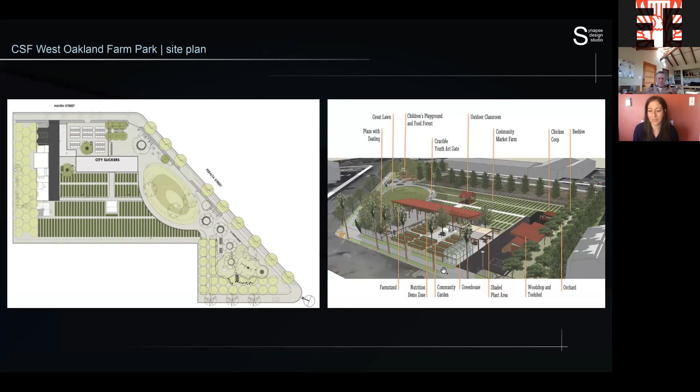Here's a visualization that was done by Lowney, not me. But you can see this was kind of the proposed view from the entry.

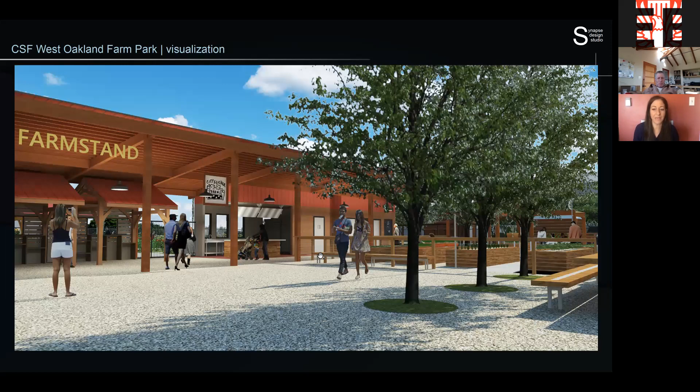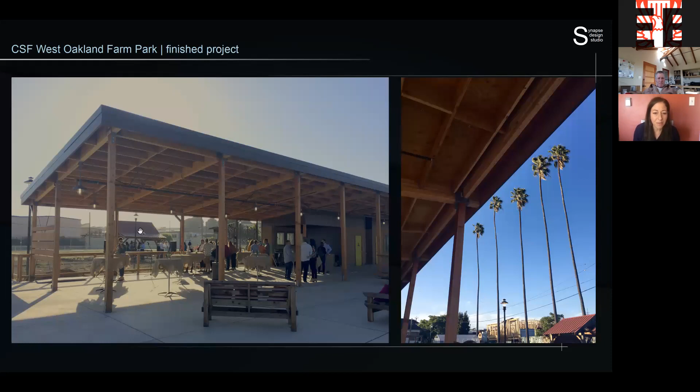And then this is the finished project with the big pavilion. You can see the outdoor classroom out here in the background, and then the actual enclosed building space underneath.

Okay, I think that's it with that. So then my very first project out on my own when I started my firm in 2016 was Cat Town in downtown Oakland. Cat Town is a cat adoption center which has a cafe attached. It was the first of its kind in the US.

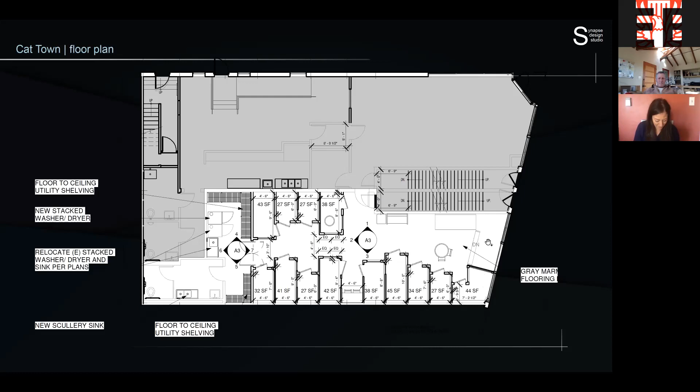So we did some really quick visualizations out of SketchUp to try out some of the ideas. This was just a very basic 3D visualization where we were explaining to the executive director how the spaces would vary, both in their footprint and also in their height.

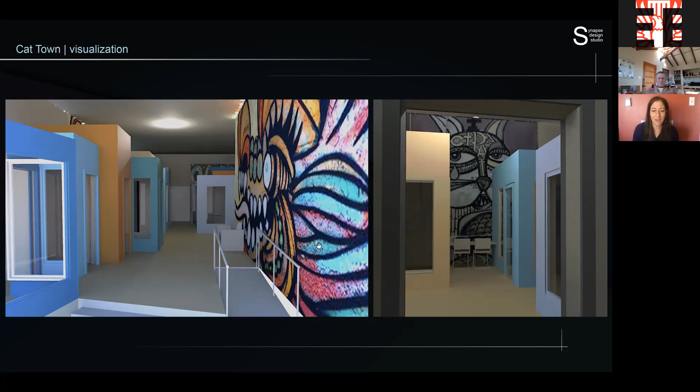The idea was to evoke little clusters of buildings instead of having this sterile clinical environment, something that would evoke a more organic neighborhood feel. And they liked this, so this is what we moved forward with.

Here you can see some construction photos, a little bit of framing, a little bit of just getting the drywall up. Now that I've hung drywall myself, I realize our drywallers probably hated us.

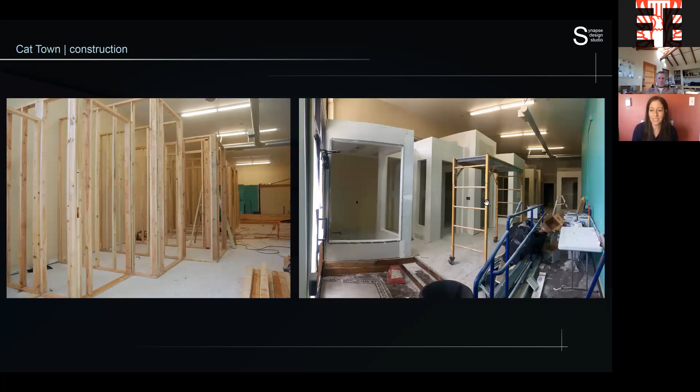That was a very fun project to work on and very rewarding. Whenever I've gone to visit, the executive director always tells me that it works really well and that the visitors really love the layout.

Okay, the next one, Vintage Berkeley and Vine Street.

This is in Berkeley. There were a couple of objectives: to enlarge the tasting area that was there, to rework circulation to allow direct connection between the retail and the rear patio, and to create visual interest at the rear of the store to draw people in and back.

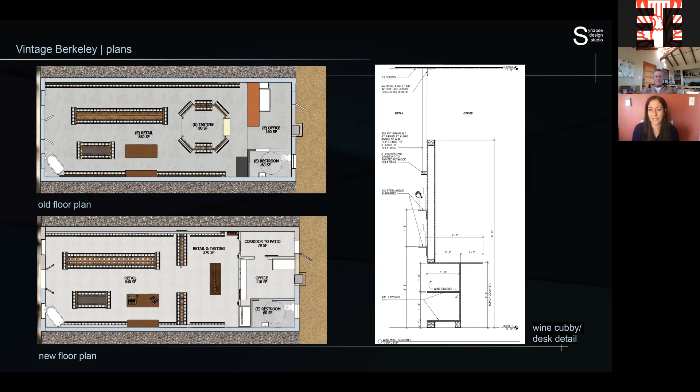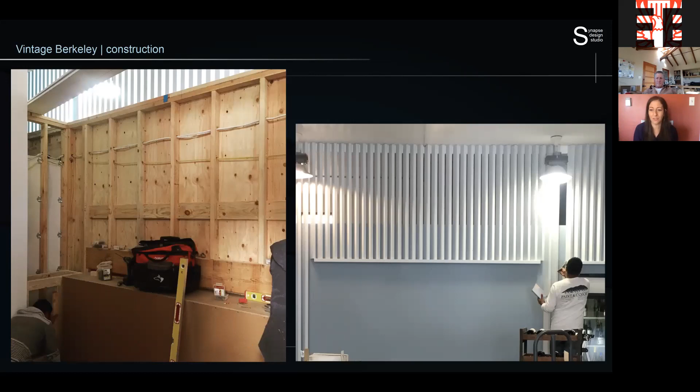There's one of the guys working on the slat wall. One of the fun things about this is that the slats are installed at an angle. So if you move through the space from left to right, you get this movement feeling, differentiation of transparency as you move, depending on what angle you're looking at those slats from. So that's kind of fun.

Here you can see the build out of the cubbies. And then this is the desk on the flip side of it.

And then as a nod to our industrial historical building, we used steel angles as the shelving for the wine.

And then there's the mostly finished photograph, which looks a lot like the renderings, I think. So they're pretty happy with that.

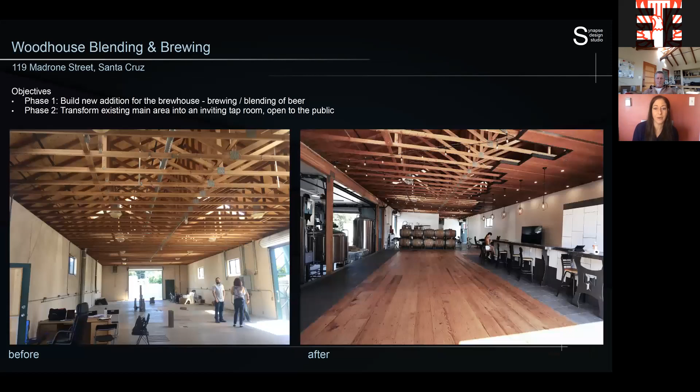And that's it. Go check them out. Oh, well, they're not open, but they are delivering wine if you are interested in getting some.

The next one was a project, also one of my early clients from 2017, Woodhouse Blending and Brewing in Santa Cruz. This is an adaptive reuse project. We are converting an old sawmill to a brew house and tap room.

This picture on the left is kind of what it looked like when I first went there to check it out. It's just this empty open building, rectangle. And this is the finished, but we'll come back to that.

Woodhouse, the clients are 4 friends who've known each other for years. One's a brewmaster, one is a graphic designer, and they'd always dreamed of opening a brewery together. These are some of my favorite clients, people who have this dream of what they want to bring to the neighborhood. We also had to remove this giant cyclonic sawdust filter thing that you'll see later on.

This happened in 2 phases. Phase 1 was to build a new addition for the brew house. And then phase 2 was to transform the existing main area into the tap room open to the public.

The building is on a parcel with a bunch of other buildings, so that made our approval process a little trickier. Parking and accessibility definitely were big parts of this project.

The floor plan on the right is the phase 2, but you can see what we did during phase 1, which is this whole not quite rectangular piece was the addition. And these are the kettles, the beer brewing kettles and the granary.

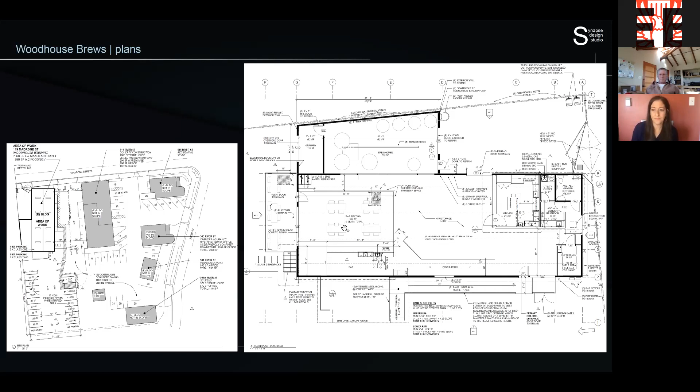Okay. All right. So, okay.

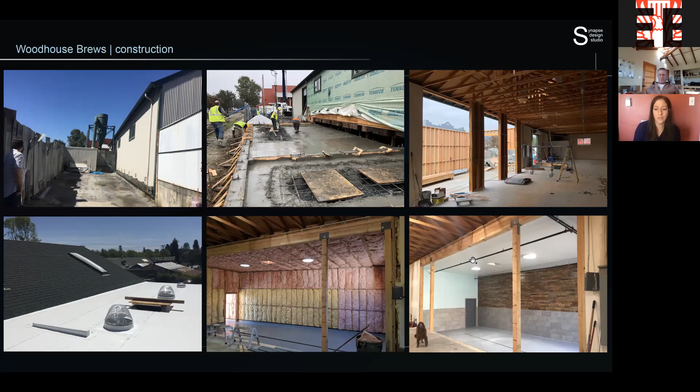solid ceiling over the bar area, bringing it down for a little bit more intimacy and just to change it up a little. I think that's it. Oh yeah, and then the exterior.

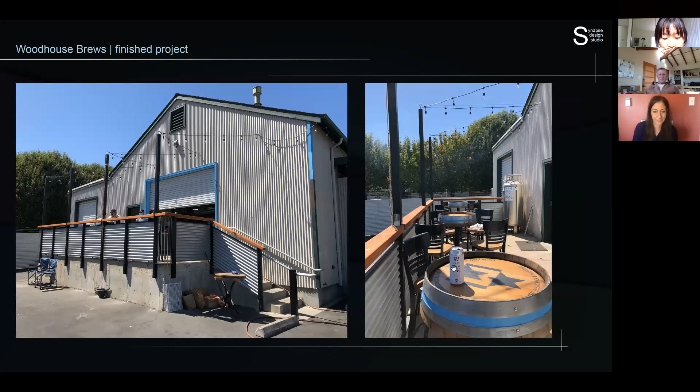So here you can see this little jut out is the new brew house granary area, and then the exterior patio, which I believe was open for a while before everything got shut down again. So if you're down in Santa Cruz, go support them. They're really fun.

The next one is Malaya Tea Room, which is in Alameda. The owner is a woman who grew up in Malaysia, which has an English-style tea culture as a remnant of English colonialism. They do afternoon tea, but with kind of a tropical twist, with different kinds of flavors and aesthetics.

So the owner told me she had long dreamed of opening a Malaysian-style tea room, something that didn't exist in the area. Again, a business owner bringing their special sauce to the neighborhood.

These are my favorite. The space was an empty shell, which had previously been some kind of retail. We designed and installed the tiniest kitchen we could while still meeting all the clearance requirements.

Most of the interior finishes and furnishings were things that had been collected by the owner. It was a pretty straightforward project with, I guess, the hardest thing was just kind of fitting the kitchen in

and getting that approved. And then the best architectural thing is probably this beam that we discovered behind the ceiling. So we demoed the ceiling and got to expose this really cool beam.

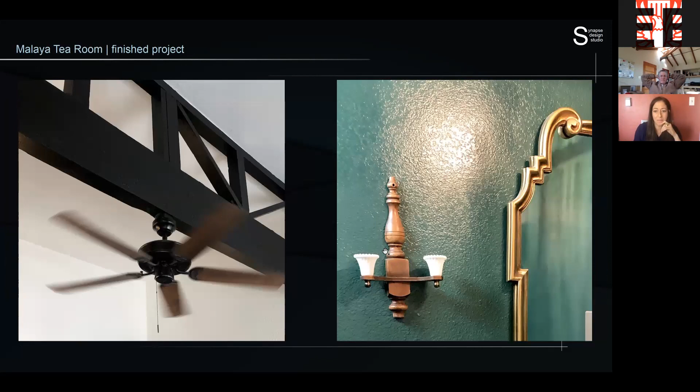All right, so I think this is the last project I'm going to talk about, the Alameda Cannabis Retail. After legalization of cannabis, Alameda opened up an RFP process for cannabis projects on the island.

It was very limited and a very competitive process for storefront retail. There would only be 4 total storefront retail shops allowed, 2 north of Grand and 2 south of Grand. So my clients, who are the owners, bought this building intending to create a boutique cannabis retail and wellness center.

The biggest design hurdle was that this is a residential building, and you can see there's this kind of weird closed-in sunroom at the front, and that is at grade. And then there are steps that go up to the main part of the house.

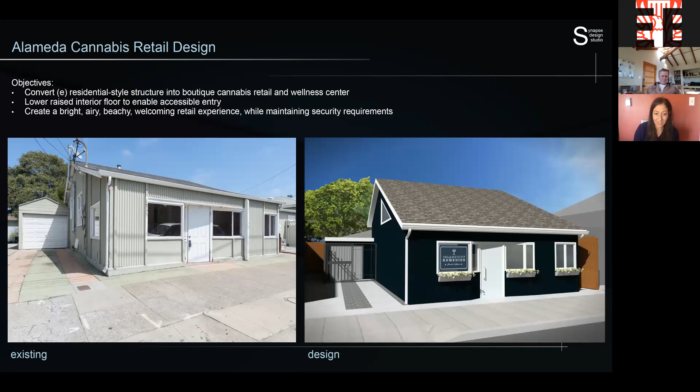It's about a 30-inch difference in height. So the trickiest thing we were looking at was accessibility requirements, and a 30-inch difference would require a 30-foot ramp, and there was no way we were going to be able to do that. And they didn't want to take up the footprint of a lift.

So what we came to was that we would demolish this floor and lower it to grade, pour a new slab, and just have a continuous level at grade.

So they did make the first cut of the RFP process, and they were down to the final 8. At that point, the owners were engaging with investors who needed to see renders of the space for their pitch deck.

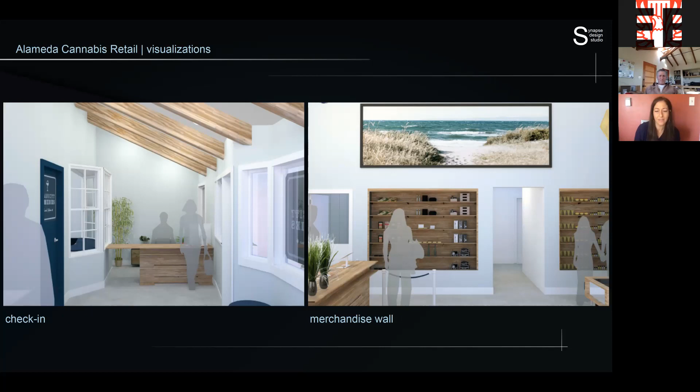Their goal aesthetically was to have something bright and light and beachy, kind of reflecting the soul of Alameda, the way they saw it. If you look to the left, you'd see some more merchandise, a sniff table, and a little window seat. To the right was the west wall, the checkout area.

Ultimately, they were not selected by Alameda as one of the final awarded owners, but they were waitlisted. So in theory they could eventually maybe build it, but for now it hasn't been built. So all we have are these pretty pictures.

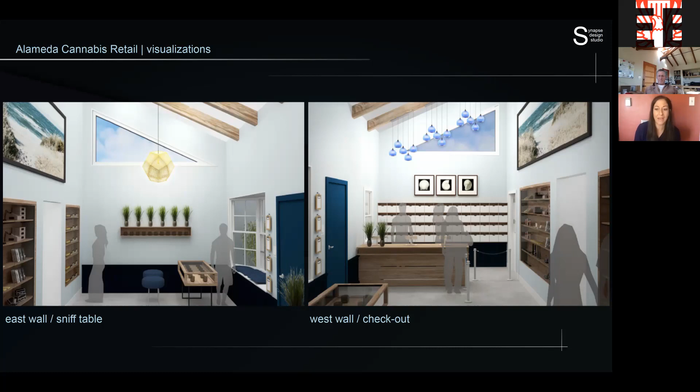Finally, I wanted to talk about a couple of the other things I've been doing that are building related and kind of feed my soul.

I've volunteered with All Hands and Hearts, which is a crisis response organization around the world. I went to Puerto Rico, this was after I went in 2019. They were still doing work following hurricanes Irma and Maria that hit in 2017. Maria hit right here in Yabucoa, and that's where we were based. There was massive destruction throughout, especially the southeast side of the island.

But most of the work we were doing was roof repair and mold remediation. Here you can see us on the roof - this is me in the back laying on my stomach. We were installing concrete cant strips underneath this ledge because there was water pooling there and leaking in. A lot of what we did was power washing these roofs, scraping off old sealant, trying to fill concrete cracks, and then painting new sealant over the roof.

And then these are some of the folks who are doing the mold remediation.

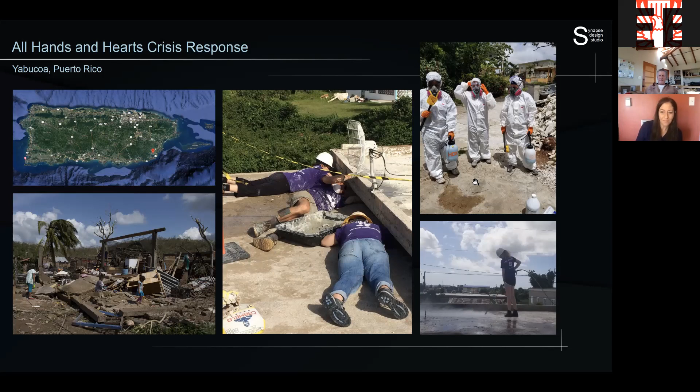The other thing I'm doing locally, which has been so much fun and so rewarding especially these last few months, is volunteering doing construction at the Youth Spirit Artworks Tiny House Village here in Oakland. This is a project providing, I believe, 25 tiny houses plus 2 community yurts for homeless youth between 18 and 24.

This is actually supposed to open pretty soon, they're shooting for later this month. I'm not sure if it will actually open by the end of the month, but we'll see. I was speaking to the director the other day, and I believe the city of Oakland leased this land to Youth Spirit Artworks for $1.

Since the first time I showed up there, I kind of just joined the McCarthy construction group. Each of these tiny houses is sponsored by either a church, a synagogue, or a corporate company, or built by a community group or nonprofit. There happened to be one that was just in framing when I showed up, and I asked them if I could join their team. So I've been building with them.

This was one of the first days I was there, on the upper right. And then here on the lower left, this is the same one. Last week I was there and we were installing trim and hanging drywall. On other days, if McCarthy hasn't been there, I've just been assigned to different things - here I'm installing asphalt shingle.

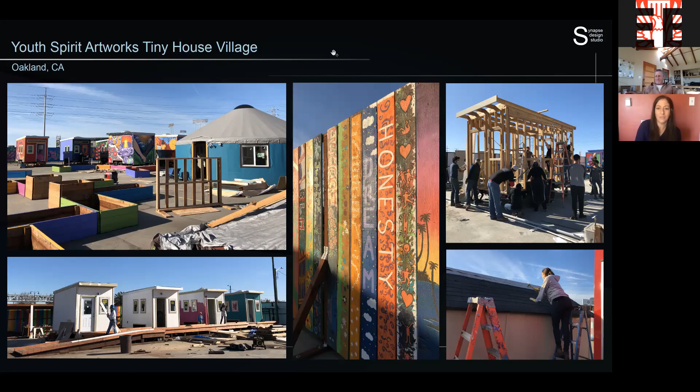Oh, can I ask a question? Yeah, it looks like we've got good time if you want to take 4 or 5 minutes for questions. Rebecca, what I'm curious about is, is Synapse Design just you, or is it a group of people working together? It's usually just me. When things have gotten really busy I've hired someone here and there, but usually it's just me.

Really beautiful work, thank you. Anybody else want to ask a question? I have a quick question.

What's a sniff bar? Oh, so pre-COVID, if you went to a dispensary, there would be jars where they would have fresh buds from marijuana in them, and they would have holes in the top so you could smell it.

Part of the fun thing about being an architect who works on a wide range of projects is you learn about whatever industry your project is, right? You learn a lot about cats, or you learn a lot about weed - it's kind of one of my favorite things. It looks like Courtney asked in the chat if you use SketchUp for your visualizations.

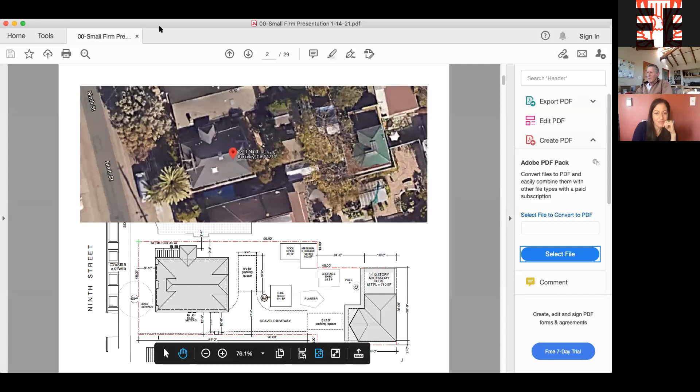Your share screen. Share, yes, okay, hang on, one more moment. Full screen mode. And do you see that? It was better before full screen. Oh really? Click back to your first slide. Well, this is the first slide. Go back to the previous screen. Okay, hang on. That was perfect, that's perfect, okay.

Anyway, Barry Wagner here, I'm an architect contractor, and today we're going to look at two projects. One is a project that's been going on for a number of years.

It's next door to my main house on 9th Street in Berkeley. You can see the site plan where that little red dot is—that's called the main building. And in the back, can't see it.

Jane, why don't you share a screen and put Barry's first slide up? Okay, oh, you guys can't see it, huh? No, sharing is paused, bring your shared window to the front. So when sharing is paused, what does that mean? Are you able to see this? You want to see this? He has to stop, you gotta take control of the shared screen. There you go, okay, this is good.

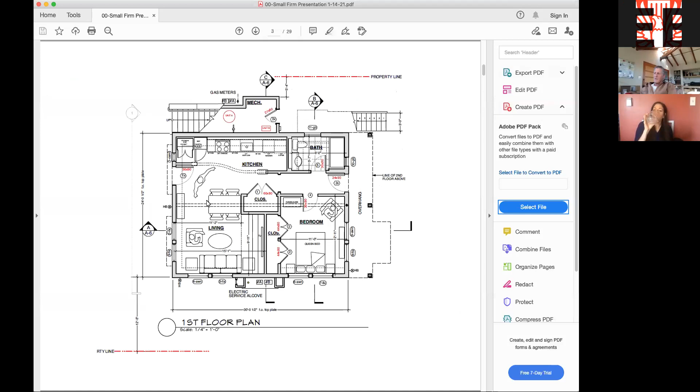There's also a loft up there. You'll see some photos of it, and a roof plan with some skylights.

This is a wall section. The building, since it is a duplex, it's very important that the people upstairs and the people downstairs don't hear each other, in both ways.

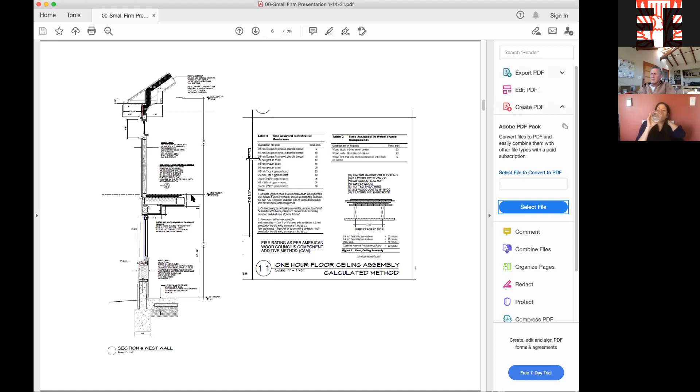So we put in a very belt and suspenders sound isolation system, where you have a floating floor on top of what's called an acoustical mat made by Enkasonic, and then a bunch of very heavy insulation, rock wool, and then 2 layers of sheetrock on the ceiling that are hung by a sort of sound isolation system made by Resilmount.

And all along the way, we tested for pounding and walking and talking and all that from above, and you can't hear a thing below from the people above and vice versa.

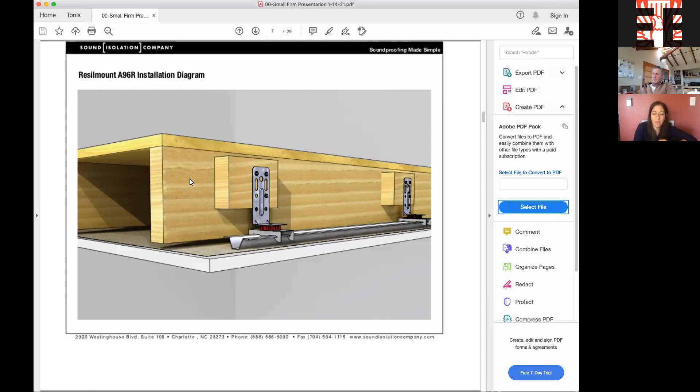The upper floor is the more interesting one. The ground floor has an 8-foot some odd foot ceiling, and not the nice cathedral kind of exposed beam thing that you have on the upper floor.

The building is insulated with foam everywhere. Body heat will probably keep it warm for the most part, even though it has a pretty sophisticated heating system.

The windows are all custom windows made by Frameworks, all vertical grain Douglas fir, and the sills are all reclaimed lumber.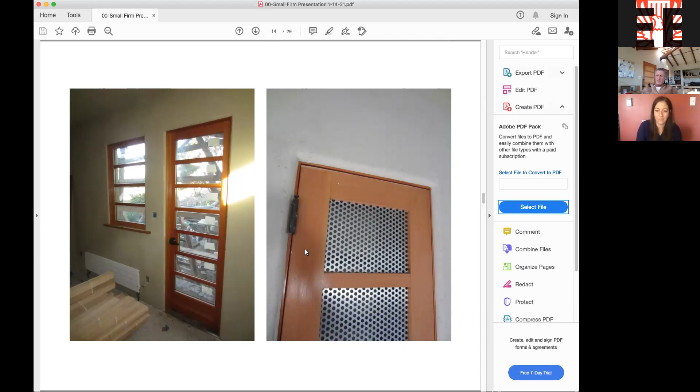The stucco is actually a textured stucco. If you remember on Telegraph Avenue, I don't know if you've seen a building on Telegraph, I believe it's Haste, called the Enclave.

It's a student housing project. It looks like it has a bunch of rocky boulders forming the base of that building. Anyway, I talked with the guys and we figured out how to do the same thing, and they came over to do some of that.

Barry, I have a question. Pardon me? May I ask a question? Sure.

What led you to buy pressure-treated pine from Pennsylvania instead of a locally sourced wood? So normally I'd use Western red cedar. That was the typical choice. It was cheaper than redwood, and if you got a good grain, it would lay pretty well.

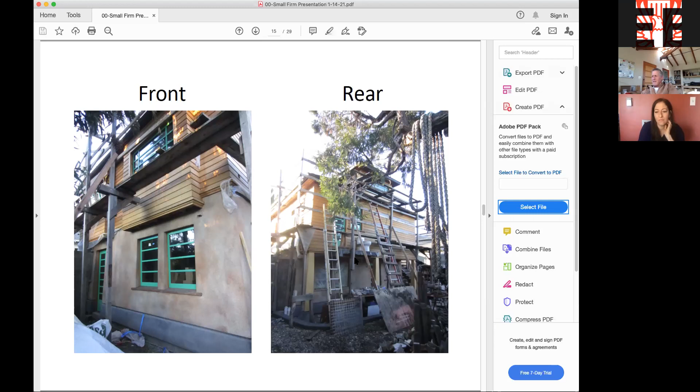So on the right is the rear—again, so much stuff you can't really get a sense of what's going on. The original house had these tapered columns with a mild case of entasis, so I built tapered columns on the back, which was an addition of the upper floor that followed that same pattern. They were very hard to build.

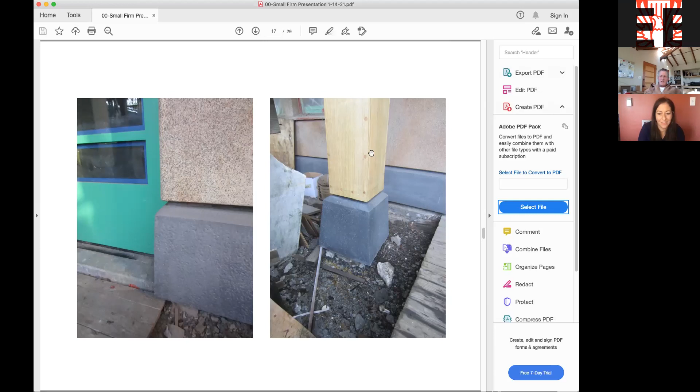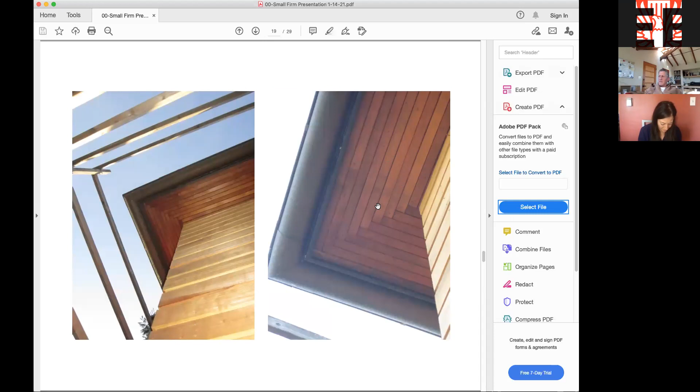And then these are soffits of the roof soffits, just a close-up of the pattern—it's kind of nice to look at. That is the building. There's a solar array on one side of the roof, and an inverter.

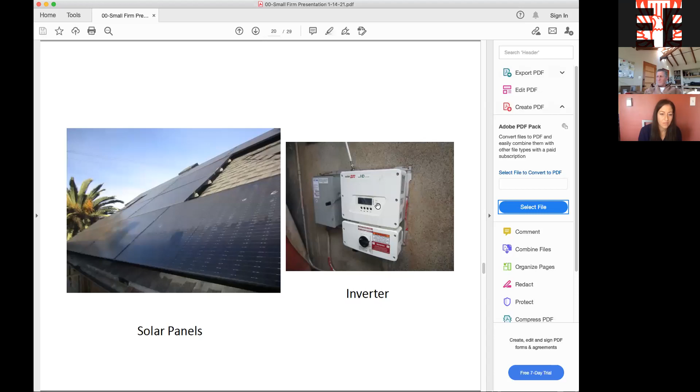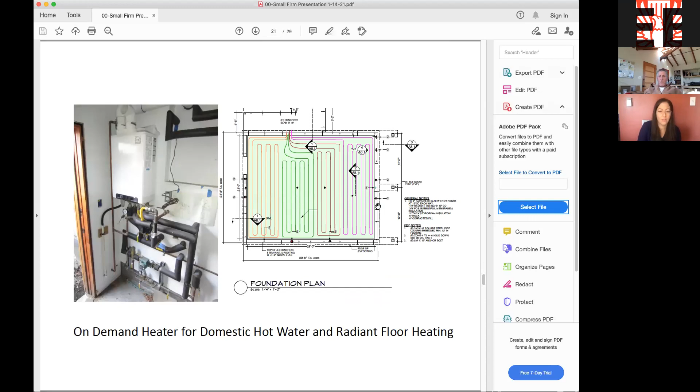The first ground floor has radiant heat using an on-demand boiler that also does the domestic hot water. The upstairs is heated by a boiler that runs through radiators, these little Runtal radiators, and also does the domestic hot water. There's a recirculation system I put in, so there's always hot water at the tap without wasting a lot of water. And that is the little project in Berkeley.

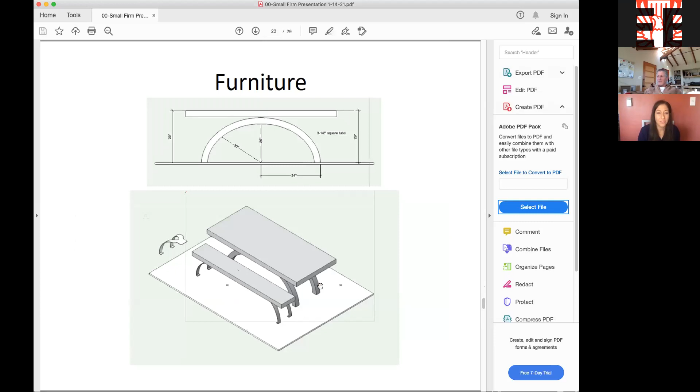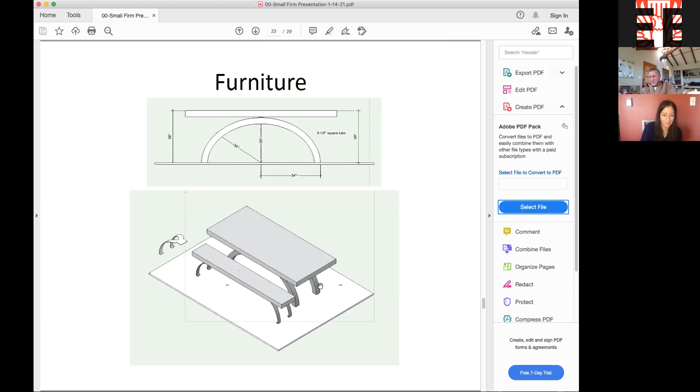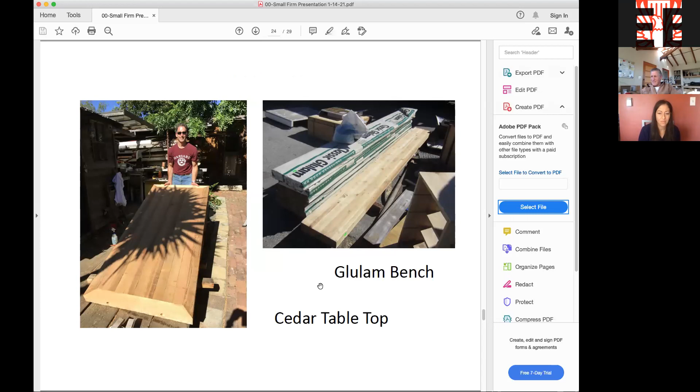Here we are, showing that I'm actually doing some work, varnishing the table to the left and routing some special Delrin, a particular kind of plastic feet for the bottom of the table.

This is what the table looks like on the patio. The legs are made from quarter-inch steel tubing that had to get bent. Nobody around here could bend it, so we took it up to Stockton, where there's a place with a machine as big as your house that can bend the steel. It's basically two arches.

And there's the table with the benches. The benches have little funny feet that kind of turn back in. This is what the little bench looks like, cut with a plasma cutter and then bent and so forth. That's some furniture that I've done.

That's it, folks. Since we don't have a lot of stuff going on outside, we decided to tame some blue jays. So this is my buddy that comes by, and we hang out on the back deck. Fabulous. That's it. Thank you.

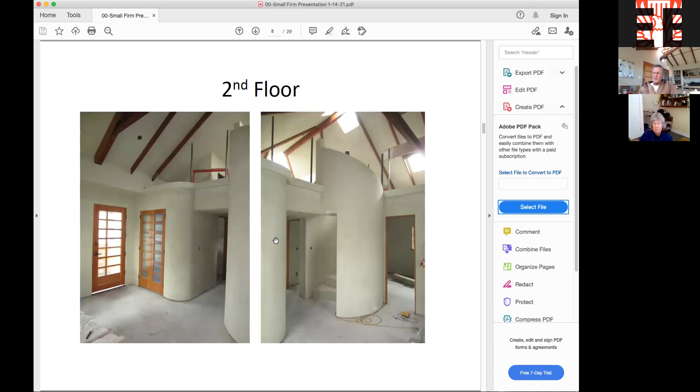Barry, I noticed somebody ask about the spiral stair in the loft area. That was a tough one to build, what an extreme pain. I could have gotten some kit thing and stuck it up there, but there's something nice about going up a stair to your private little loft area where not everybody in the living dining can see you. So I wanted to close it off in a way. The middle post of that stair is actually an old light pole, tapered from about 5 inches to 7 inches at the bottom. But the whole thing was stick built, not a kit like you would normally do.

Darren, why didn't you use radiant heating upstairs as well?

I think it was just too complicated with too many broken up areas, and also I wanted an isolated floor system. That floor system itself was a pain. You've got the old 2x8 joists, on top of that 7/8 inch tongue and groove sheathing, on top of that 1/2 inch plywood which acts as the shear, on top of that an acoustical mat, and on top of that two layers of 1/2 inch plywood crisscrossed, with gaps all the way around. Adding radiant heating on the floor seemed like a complication I didn't want to deal with.

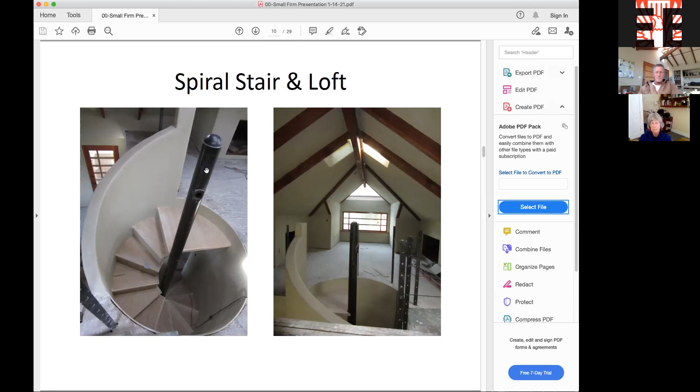Let me see if I have a good... Barry, say it again, keep an eye on it. Okay, you can kind of see. So when you say keep an eye on it, what's your concern? Corrosion of the galvanized connectors. That's certainly a concern. And I'd be concerned about whether the treatment achieved full saturation of the material, since the milling might have exposed it. That is not a question - it does achieve that, that's not a question.

In fact, the whole idea came from a playground near the Berkeley Marina and the aquatic park - a job I had helped with as a volunteer a number of years ago. It's the shorebird playground, right next to the adventure playground, and also a park called Dreamland at the bottom of Bancroft. That wood has been there for like 20 years and it doesn't gray, it browns a little bit but ages absolutely beautifully. We just used regular coated screws on that, and it's lasting unbelievably. I'm very surprised.

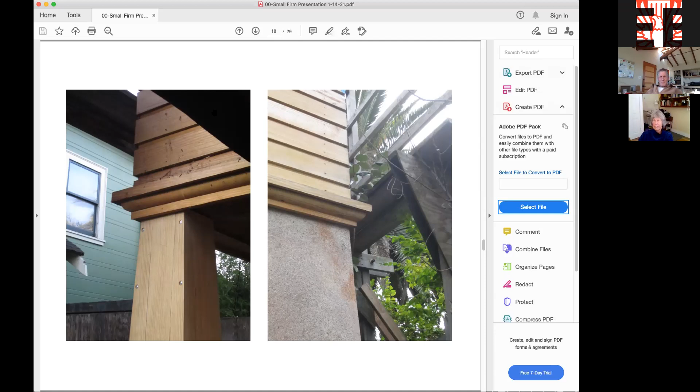What were the wood counters in the kitchen? That was one of the toughest things I had to make. They're maple, and you probably can't see it from the photograph, but let me go back. You can see on the left side, that's the kitchen, and the counters are in an L shape, and they fit perfectly, joined together with these dog bones.

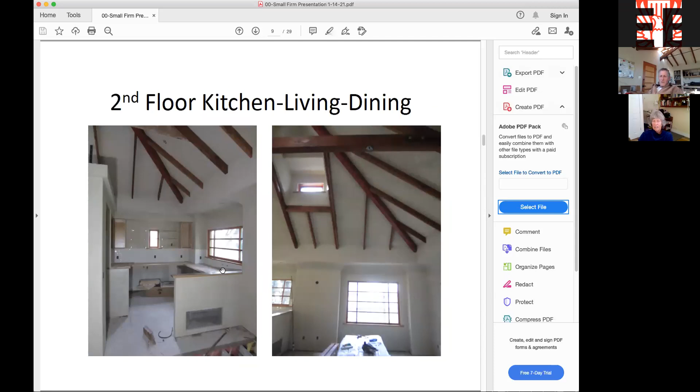The cool detail, I think—I've done this before—is you know how in butcher block, when it goes up against the backsplash, you get this nasty line of mold and crud that can't be cleaned? So I milled a piece. There's a cove that goes up about a half inch to meet the bottom edge of the tile. So stuff gets on there, but there's no crack, no wall-floor junction for stuff to collect. It's sort of a self-cleaning thing.

A buddy of mine, a cabinet maker right down the street, let me use his Festool Track Saw. If anybody's used one of those, they'll realize what it means to cut a straight line, because where these butcher blocks join, one joins here and one joint butts into it, it has to be an absolutely seamless joint. You can't see a joint. Anyway, it was a tough one to do.

Is it butcher block? It's a 1 3/4 inch maple butcher block from the Boos Company. You can get butcher block cheap, 1.5 inches, made up of little itty bitty pieces, but this stuff has long, continuous pieces. I got it at White Brothers—they were closing down their warehouse and had a bunch of it, so they gave me a pretty good deal.